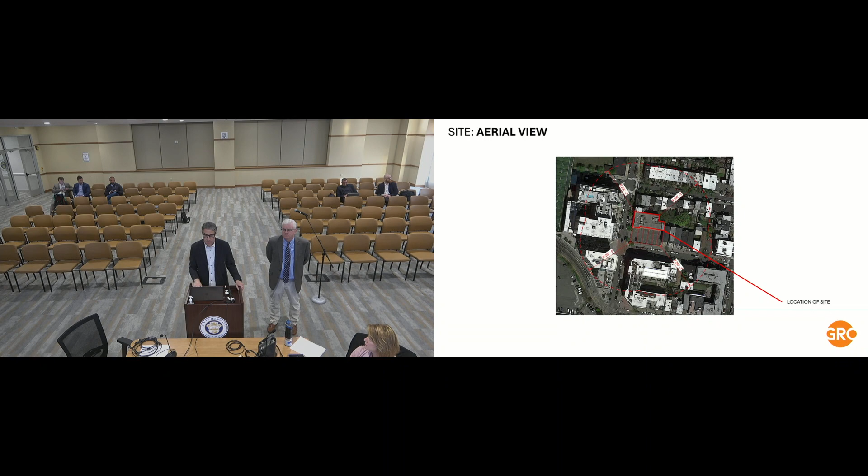You see that here in Tidewater. This is the historic buffer district in Tidewater. And then we have some photos of the building. You probably know this building. It's very handsome, some have said it was a firehouse, had been a firehouse. Some had said stables. I think it might have been even both.

But you see that the building was basically modified a little bit in 1998. We have the sort of drawings of that and so forth. I should also say that the Belfuse was a client of ours prior to the current owner here as well, so we've lived with this building not only as neighbors, but architecturally for some time.

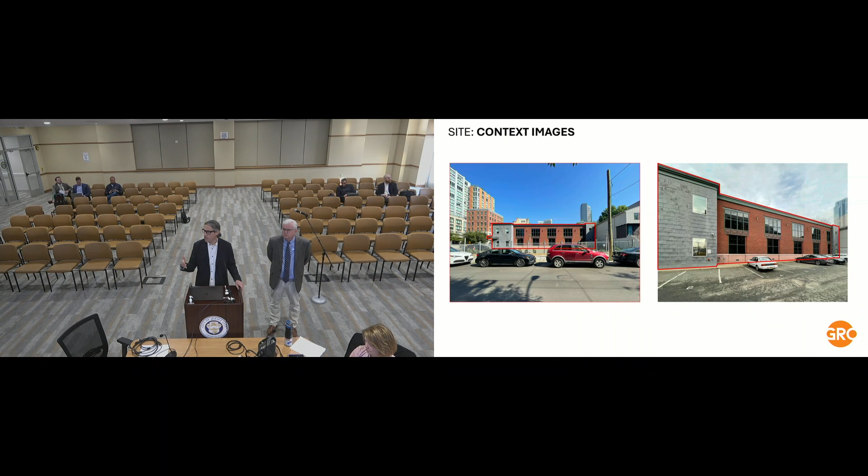This is the side yard. The thing I'd like you to take quick note of here is a Siamese connection that will have to be moved. Ms. O'Neill and I have spoken about this. Our preference is to move that from the south-facing facade to the sidewalk. If we do have to put it on the facade of the building, we'll work that out with staff.

And just for the record, that was subject of a certificate of no effect that was filed with Maggie, and that's referenced in the report.

This is the existing condition survey. You see the lots to be subdivided are largely a parking lot. You see the Belfuse building, as we call it, which is the gray entity here. And then the proposed subdivision is as such.

As Mr. Harrington said, all of the interior lots are 20 feet wide. The corner lot is 25 feet wide as required by Tidewater. And then we have a little bit of a varying depth, but that depth is somewhere around 65 feet. It gets a little tighter on the corner.

Just to take you through some key points briefly, this is meant to be subdivided from lot 30 to lots 30.01 through 30.07. The lot area as an existing condition is 15,000 feet. The total building area that will be left at Belfuse is 6,925 square feet, which is the existing condition, as is its configuration of 2 stories and 27 feet 2 inches.

As I mentioned, that existing structure will be adaptively reused, and then a very modest portion of the overhanging cornice on Belfuse will be cut back, basically demolished, and that was also in your staff report. And there will be some looking at window openings to make sure that we are complying with code.

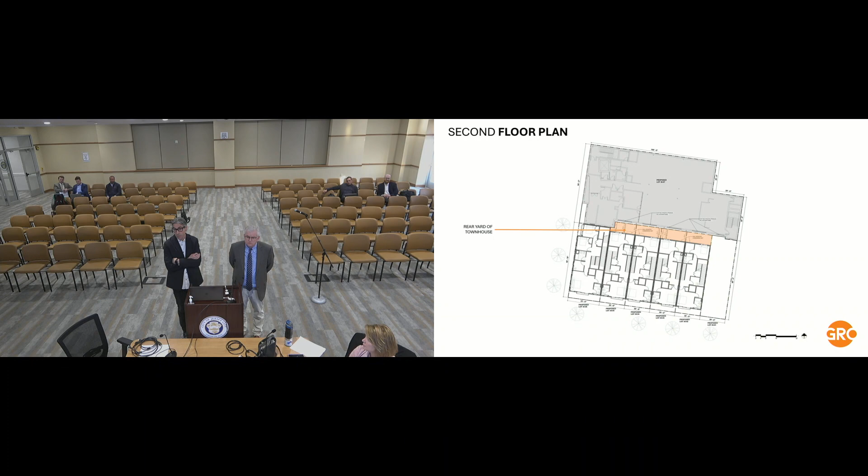What is the Belfuse building currently being used for? It's vacant. And you said it'll be adaptively reused for a permitted purpose, would that be commercial or residential? Currently, the plan is to make it a preschool, so more commercial use than a residential use. Both are considered by the plan.

I will just note, for whatever goes on in the Belfuse, they will have to file an application with HPC, right? This is, once again, just a subdivision application. I understand, I'm asking because, well, I'll get there. But so I know that we're only looking at the subdivision, but you're currently contemplating townhouses.

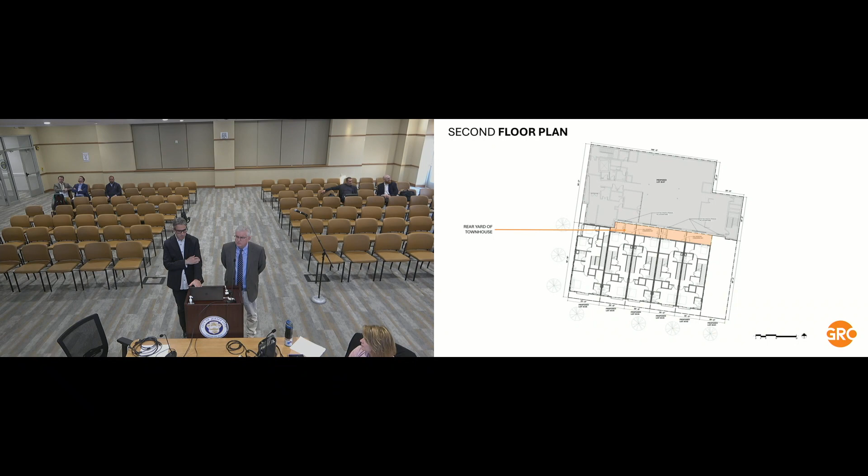And did you say there would be 3 family homes? Most likely I think it's 2 family homes that we're proposing. And how many parking spaces are there currently? There's no parking proposed. No, I mean in the existing parking lot, how many spaces is that?

About 22, I think. Okay, I am just a little concerned, not so much from a historic preservation perspective, but frankly, as a resident in the area, that we're looking at adding 10 to 12 homes and taking away 22 parking spaces. Also, sir, you have to remember that right now, this is a totally underused asset.

No, this is not public parking. This is gated parking, and it was never public parking, right? This was only for when Belfuse had the fortune of hosting its world headquarters or whatever it was called in Jersey City. Its employees would park there.

The Tidewater redevelopment plan, which again is a little bit beyond what we're here to talk about, allows for townhouse development at a density that is less than the R1 standards and doesn't require parking.

And I know too, if you live in a neighborhood, you're probably well aware too, across the street has parking within the building, which I believe is open to the public as well, not specifically just for their residents. That's right. But it would not be required on these sites.

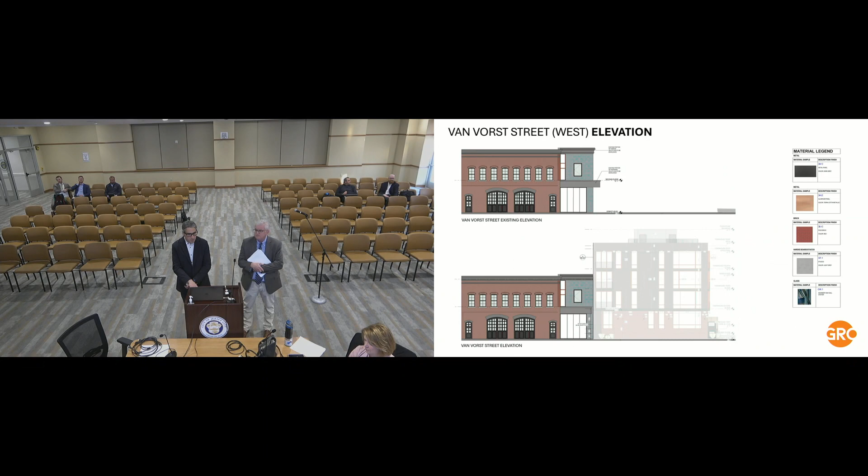And so those windows, in their image on the right, those 4 windows would be blocked up, or would they remain? In fact, I can show. Sure. I'm not sure how far to get into this, but basically this is really more for an application for the reuse of the building.

But basically, because that gray portion of the building, which is new, is actually extended back, if you remember the site plan kind of jogs a little bit, that also makes the depth of the parking lot the least deep at that point.

So those windows would actually be removed. They're not needed. And also, there's a building code requirement that was not previously considered, I don't think, that basically allows for a kind of percentage opening on that facade that would require us to close a window.

Now, I think that's an easy choice, because if you actually look at the rhythm of the existing windows there, right past the gray, down here, that's a double window, whereas on this side the cap is a double and a single, this happens to be a quad and a double, with quads and doubles in the middle.

So just moving this to a single seemed to be the best way to kind of make that code compliance, which is something we're gonna have to do anyway.

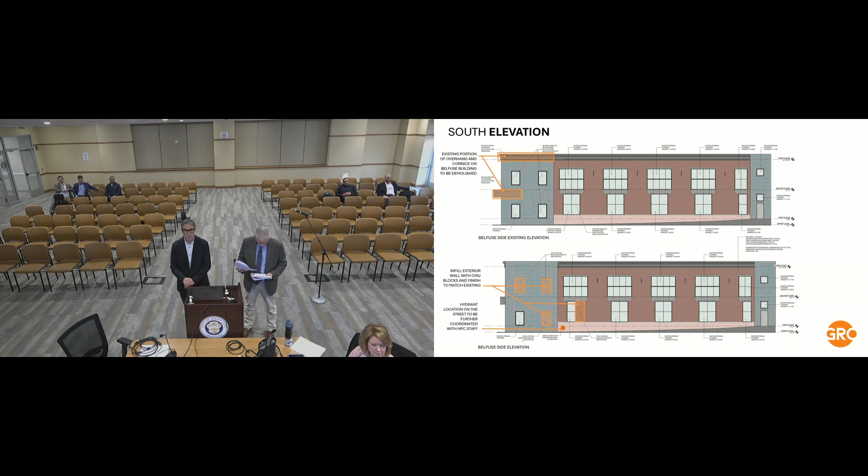One more question: the new lot that you're creating, that's just going to have the existing building on it, and maybe this is a question for staff, but would that then create a lot with essentially 100% lot coverage on it? Yep.

So is there any concern with that? That may be something more for the planning board, that we're creating a condition where there's a building with full 100% lot coverage. From a staff perspective, I'm really not particularly concerned about that. It was already a non-conforming building. We already had no rear yard setback here. If anything, by subdividing this, we are actually making its side yard setback much more conforming.

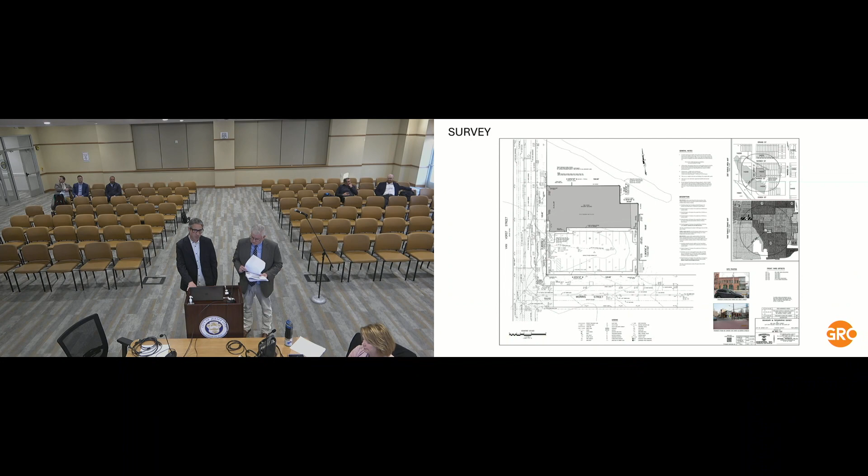Believe it or not, we are creating a little bit more pervious coverage because we're removing the asphalt. As I showed in the site plan, which is not approved yet but has been worked through with staff, there will be a small amount of pervious area as a rear yard. This whole lot at this point is slated for a playground, so there will be pervious coverage there as well. I don't know that amount off the top of my head.

The idea is that seventh lot, lot 3001 in our subdivision if I'm not mistaken, would be given to a kind of accessory use to the adaptively reused Belfuse building as a playground. It's going to be something for use by perhaps the daycare or whatever use that this new building has. It's not going to be like a public park or playground, just making it clear. Correct, it would be in connection with the daycare in the Belfuse building.

On this particular drawing, it looks like the playground only takes up a little more than half of that lot. We haven't really laid the playground out yet, but there's some concern about just putting children close to the street. We haven't worked that out totally yet, but we're not going to run that playground right up to the sidewalk. It's not a split lot, it's not like you're going to have another use towards the front of it.

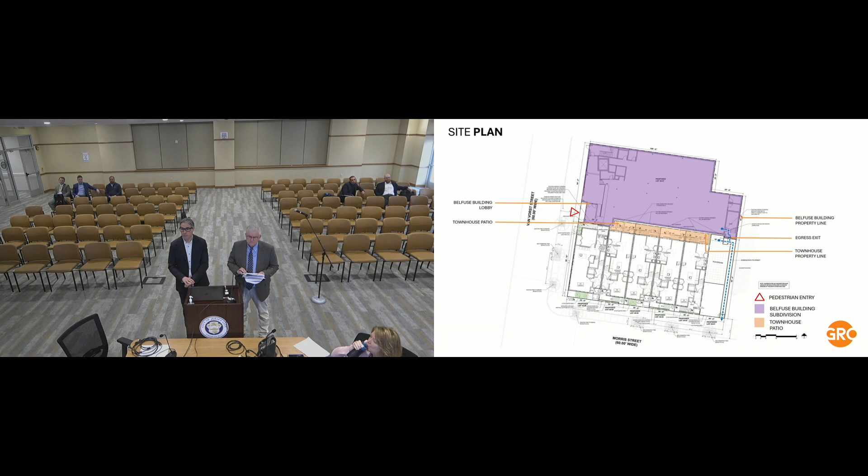Are there any additional questions? Chuck and Rich, anything else to add? No, that's all. It'll be a great addition to the neighborhood.

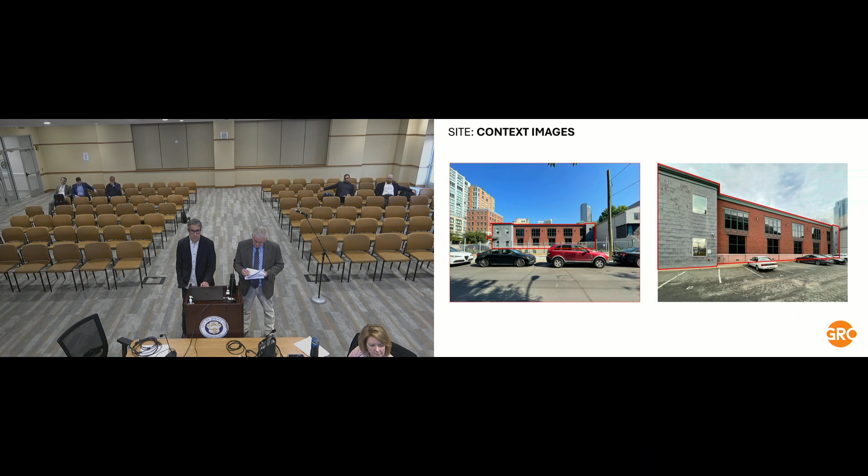The only other question I had, and I think this was covered, is that the lot is bisected by the district boundary. It wasn't clear to me - is that boundary the building? Because on this map here, it looks like the boundary goes through the building. It does, I think it's just an error. Yeah, it's okay, an alignment thing that has to be fixed. Okay, that's all I wanted to clarify.

Was this building still half in the district or something weird like that? Which I think as a result of this, we're all in agreement that this building's in the district. What we're subdividing out is not in the district. Yeah, you agree with that? Yeah, that's what happens as a result - you got half or full. It's like, you can't be almost pregnant.

Understanding that the gray bits of the building were part of that 98 addition or renovation - the windows on the south, within the existing brick fabric that face south, those don't appear to be historic. Can you speak to, since you're proposing to brick up at least some of it, when they're from? They're not historic - they are inoperable aluminum frame windows painted in a green that basically matches some of the treatments that were done to the building in the late 90s, 98.

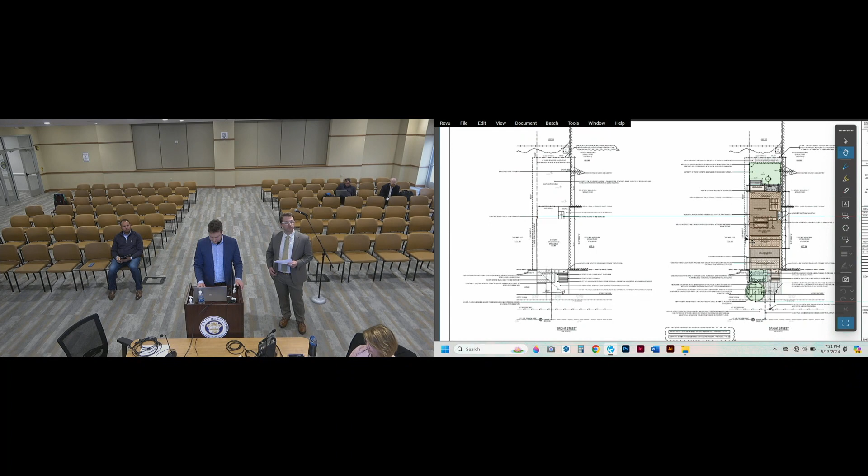Moving on to the proposed site plan, we are proposing our standard site improvements: new sidewalk, new curbing. We're proposing a street tree in front of the building. We're also proposing new landscaping of the front yard and a replacement of the historic fence that existed there at one point, but has since been removed before the current owner bought the property.

We are proposing several green roofs along with occupiable roof deck areas for the residents' use. We're also proposing glass sky doors for the roof, so there will be no bulkhead on this building.

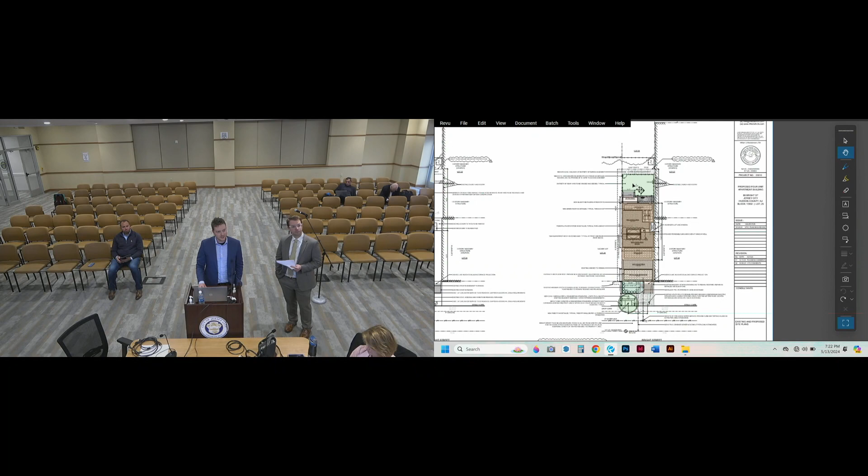Moving back to the rear yard, we are proposing new landscaping, a fence around the perimeter, and a new stoop and small patio area for the ground floor apartment. This is just our standard site details, so I won't spend any time on this, but I'm happy to go through it if there are any questions.

Moving on, I'll quickly go through the floor plans for the proposed building. We also have the existing floor plans here for comparison. The existing building will be gutted and reconfigured as part of the project. We're also proposing that a portion of the rear facade be removed to accommodate the addition. On the basement level, there are 4 units in the building.

Each unit is a two-bedroom apartment. The ground floor unit has a small entry vestibule underneath the existing stoop, which will remain as is. There's a bedroom in the front of the apartment, bathrooms towards the center, a second bedroom, and then a living space with a patio out to the rear yard.

The first floor is a similar configuration. We're maintaining the existing stoop and entry vestibule, and constructing a new stair to access the upper floor apartments. This unit also is a two-bedroom, two-bath unit with a bedroom in the front, bathrooms in the center, and living space towards the rear. This unit does have a small balcony as well.

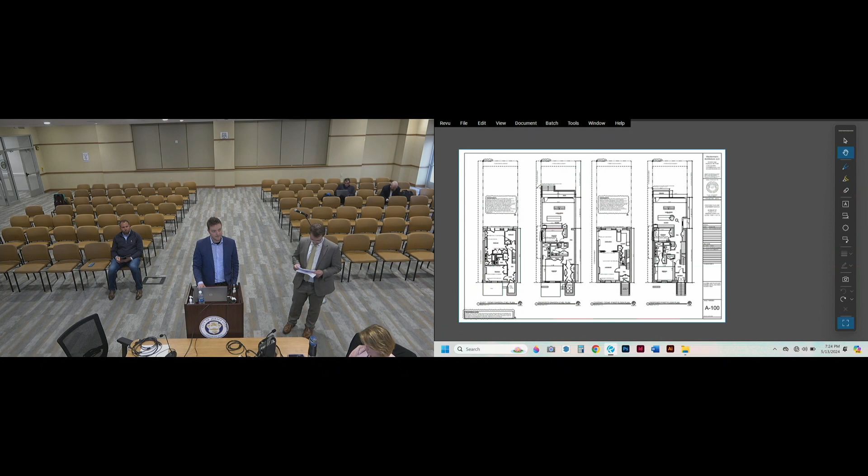The third and fourth floor will house two duplex units. The first unit towards the front of the building has the bedrooms on the lower level and the living space up above on the fourth floor. The rear unit is the opposite, with living space on the third floor and bedrooms on the fourth floor.

On the fourth floor plan, this is the setback I discussed previously. We have a 10-foot setback for a green roof area, and I'm proposing a small roof deck for this unit directly off the living space. The stairs continue up to the roof, and again there's another roof deck for the front apartment as well as the rear apartment. Those are set back from the facade an additional 10 feet.

Here we have the existing and proposed elevations. We're going to be reconstructing the iron fence along the front of the property, repointing and refurbishing all of the existing brownstone and brick on the facade. All the windows will be replaced to match the historic photograph. We'll also be replacing the front entry doors and restoring the transom window above the door. We are planning to repair the cornice, and above that you can see the proposed fourth floor addition.

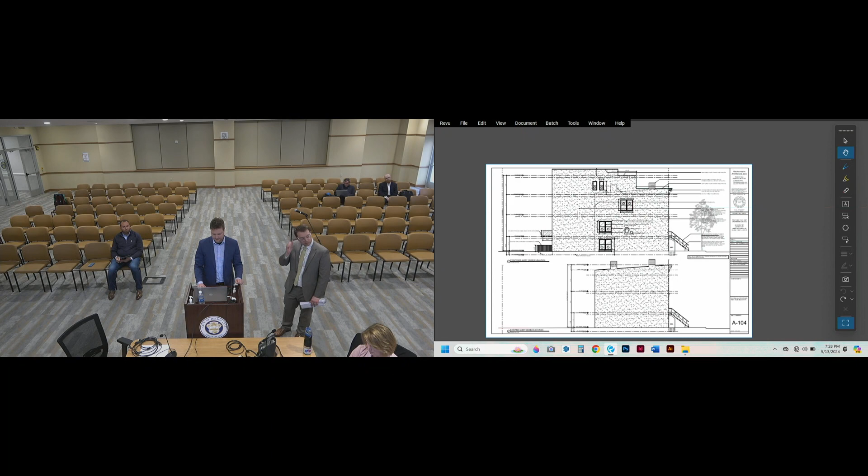And then our final drawing here is the building section of the existing and the proposed above, with the sightline diagram. One of the unique things about Bright Street is that it is a wider street, so it results in a greater setback for that fourth floor addition, which will not be visible from the public right of way.

Here we have the proposed and the existing block elevation. You can see that the proposed elevation is sort of in keeping with the height and general bulk of the buildings along Bright Street. I also have an additional exhibit, which I'll share at the end of the presentation, showing both of the two developments next to each other.

And then finally, we have our material selections for the building, including specifications for the windows for the rear and the fourth floor addition, as well as the sky door on the roof and the railings along the perimeter. So that concludes my presentation. Thank you.

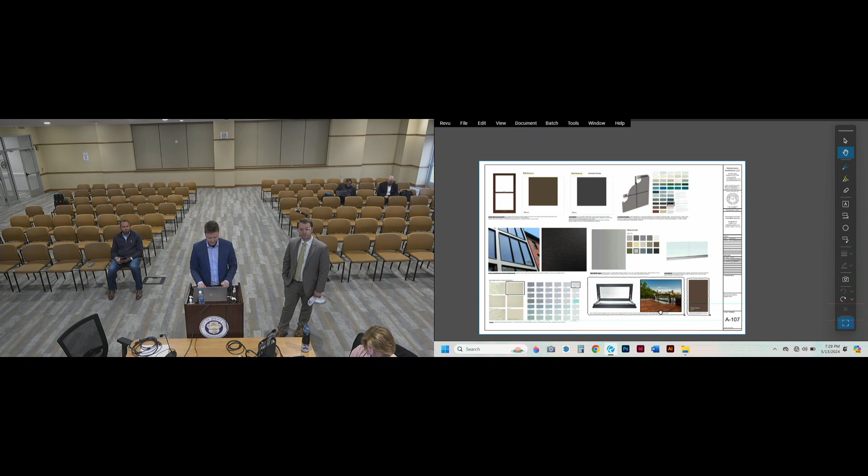So the next application is for a neighboring building.

So those windows that are proposed on the lot line, will those be in a light well then? Yeah, and they'll be coordinated with the building next door.

Okay, and I believe you said on the top of the building there's a glass rail, but there's also a roof or a deck at the lower level. Is it a similar glass rail? How is that handled? Yeah, let me go back to it. Just zoom in on the section.

So for the third floor roof deck, we're utilizing the parapet as the railing for the deck. We do have a divider, which will just be a basic metal railing, but that'll be well below the top of the parapet. And then for the roof, we set the railing back from the edge of the roof, so again it would not be visible from the public right of way.

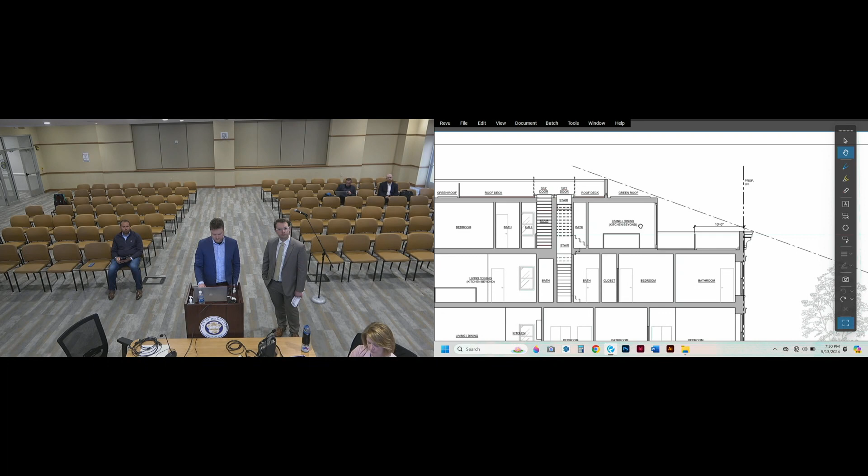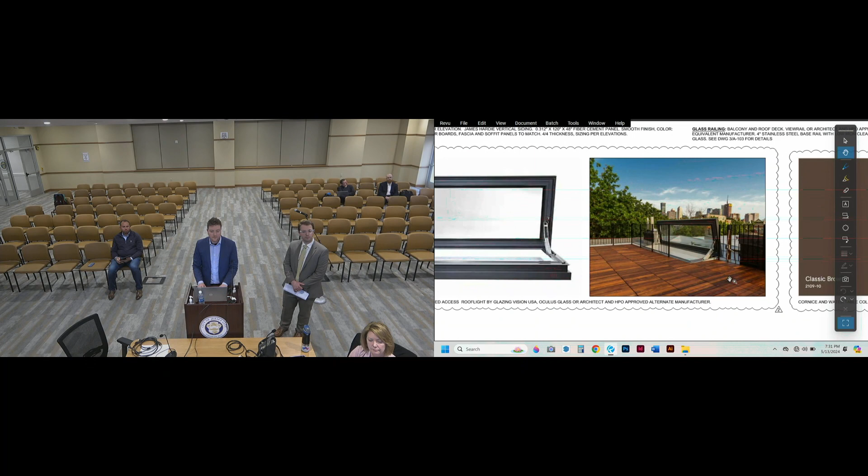Very good. Could you please show us the detail for the proposed door and explain the choice there? Sure. Actually, zoom in on the... not the sky door, the front. There's a change proposed, I believe, to the main door. But I do appreciate the sky door. Thank you.

So again, we're matching the tax photo, which originally had a double entry door. We're matching the same style and proportion of the photograph with the divided lights. All of the trim around the opening is original, so we're going to be keeping all of that trim and replacing the transom glass as well. Very good, thank you.

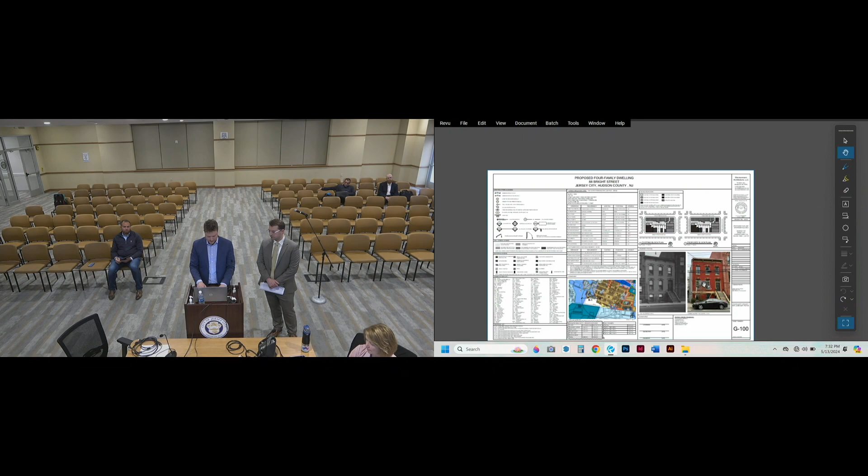And you're sure it was originally a 7-foot door? The transom size looks like it hasn't been altered. Yeah, that was a question we went through with staff as well, whether or not we thought that was original. You can kind of see here it appears to be proportional in this photograph, and I think that this trim, while it's hard to see in the photograph, I believe to be original, as is the frame for the transom above, but they replaced it with an opaque piece of glass at some point.

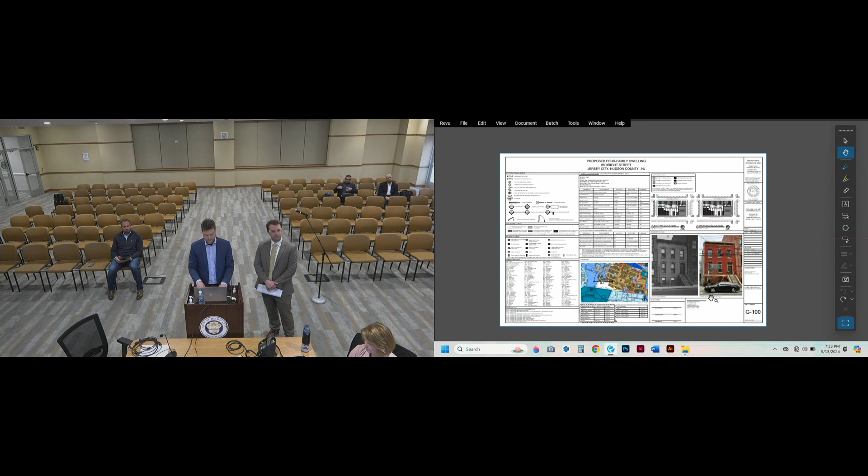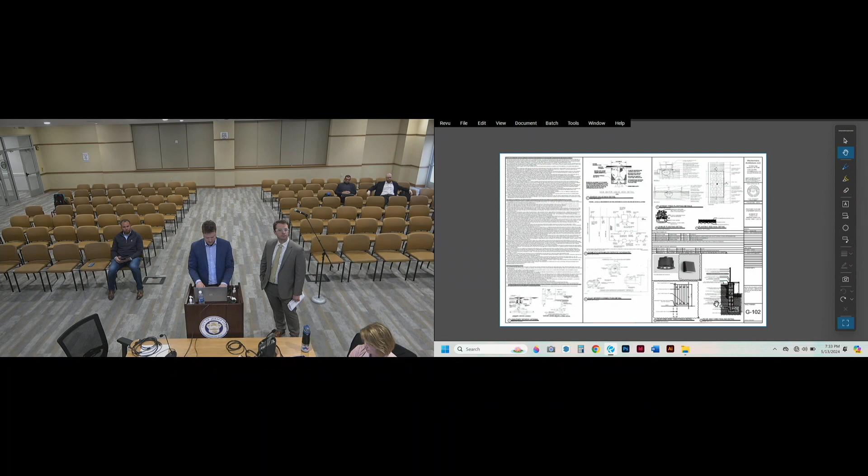And the set that was submitted, I don't know if the numbers are exactly the same, but it's A104. Excuse me, no, it is. Okay, I'm looking at the wrong one, sorry, give me one second. It is, yes, A104, and it's the proposed west elevation. Yeah, so it is the same.

What I'm looking at is there's a 3'6" parapet at the top, and it says aluminum coping, color to match stucco below. So is that a railing up there, or is it an extended parapet? It's just a parapet. Okay. But we do have an aluminum cap on the parapet, it's sort of our standard detail.

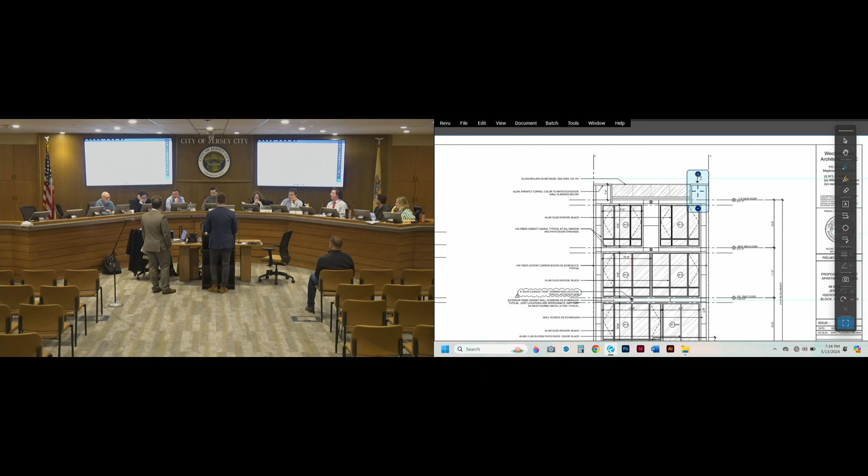Okay, so where's the glass railing then, or any of the railings? It's just on the front and the rear facade. Let me go back. So the sides are a parapet, and the north and south elevations are railings? Is that how you're doing it? Right. Yeah, so we extend the parapet around the sides and the rear, and then we just have the glass as the center portion. It's a similar detail, although the glass is a little more expansive on the front facade, but the parapet continues along the sides, and the glass is provided in the center.

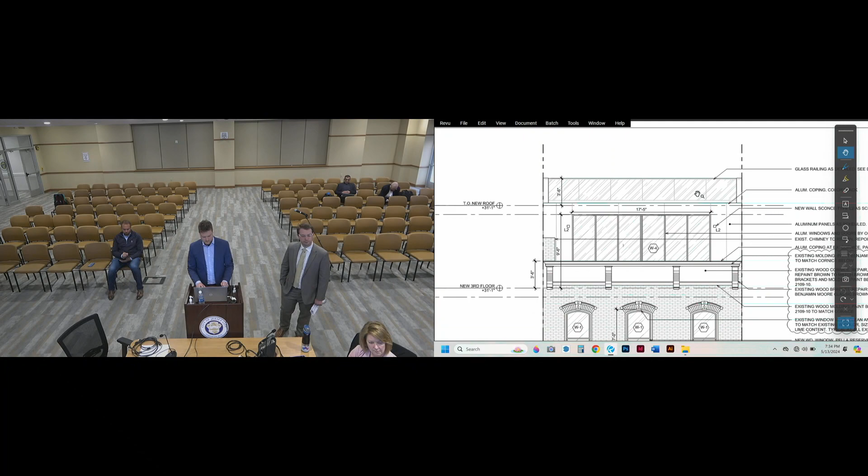And is there a reason you went with that instead of just a railing around the entirety of the top floor? It was just, we had so many conversations about the railings and the specifics. I can't recall specifically.

But I think Steve may have some insight on this. People feel uncomfortable with railings on the side. I think one of the things about having a railing instead of a parapet was that it would cut down on the apparent mass of the addition. I don't know if this is going to be visible from anywhere on either side, but I still think from other portions of the lot it would still help cut down on the apparent mass by not having a parapet with the same conditions as the addition below.

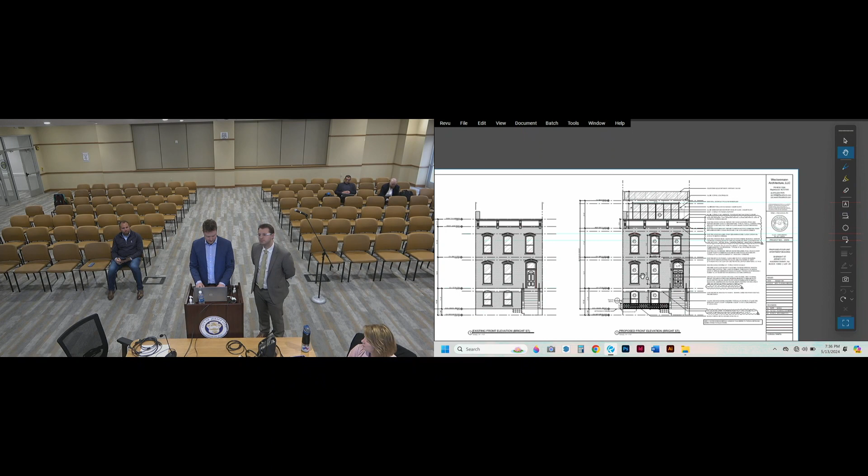Sure, it's hard to see in this, sorry, I misheard you. So the building on the corner is significantly taller than this building, and taller than the addition. So we have a parapet condition on that wall because it sits right up against the brick of the neighbor. Will, maybe you could show the exhibit with the adjacent proposal as well. I think the idea of the glass on the front and rear is to minimize the impact of that upper story.

So this is the combined elevations with the two projects. Again, this will be shorter than the neighbor, shorter than the adjacent building. Sorry to interrupt, do we have to mark this? Yeah, we do. A1.

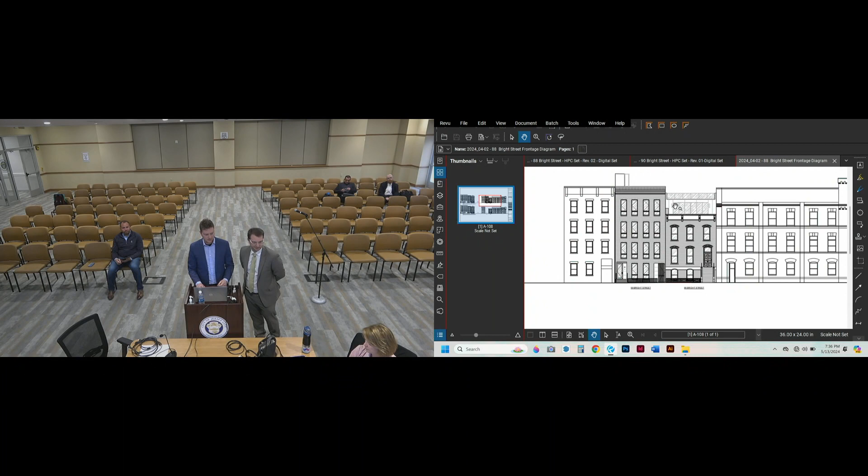So I guess either way, it's going to be up against neighboring buildings on either side anyway, so it doesn't really matter, except at the front and back where you have the glass. Correct.

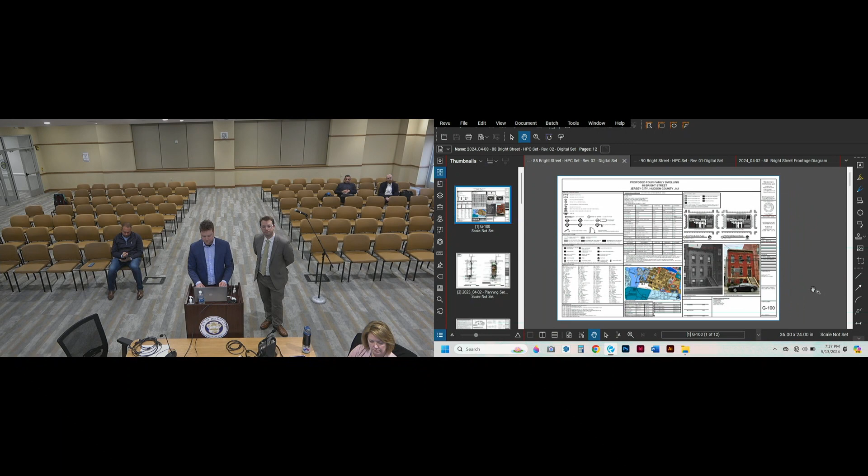You stated that there's no visibility directly across the street. If 90 Bright were not to be built, would there be oblique visibility of the addition? Yes, there would be.

And if the commission feels more comfortable reserving voting on this until hearing the second presentation as well, we can certainly do that. Are there any axonometric or render views of this? No, not at this time.

Do you have an existing photo of the rear facade somewhere? I think one was submitted with the application. I believe I have it. Helpful if the agenda was up. He's trying to pull it up.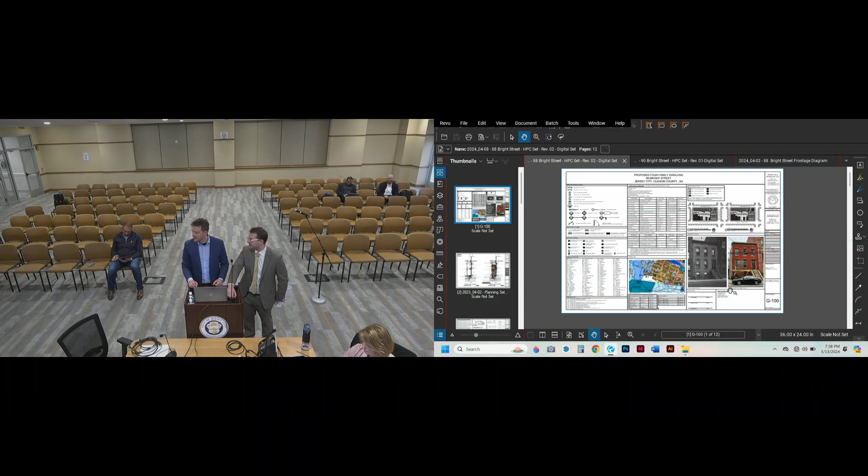Yeah, it's in the portal, maybe you can pull it up. I'm looking at it now. I need to borrow your dongle if I'm going to put this up. This whole piece you need, Maggie? Yeah, it only comes out as one piece. Although the website loading would be helpful. Thank you. Never had these issues on Zoom. Did it go? All right, be great.

It's still loading. Maybe in the meantime, you can ask a separate question. What's the plan for the painted brick on the front?

The idea is to remove the paint and repoint the brick as necessary. Have you done any probes? Is there a sense of what condition those bricks are in, and have you done any grout color testing? We haven't done any probes at this point in time, but the brick is in fairly decent shape. I believe we've had conversations with staff on submitting samples of the grout and doing test probes as part of the future work. Thank you.

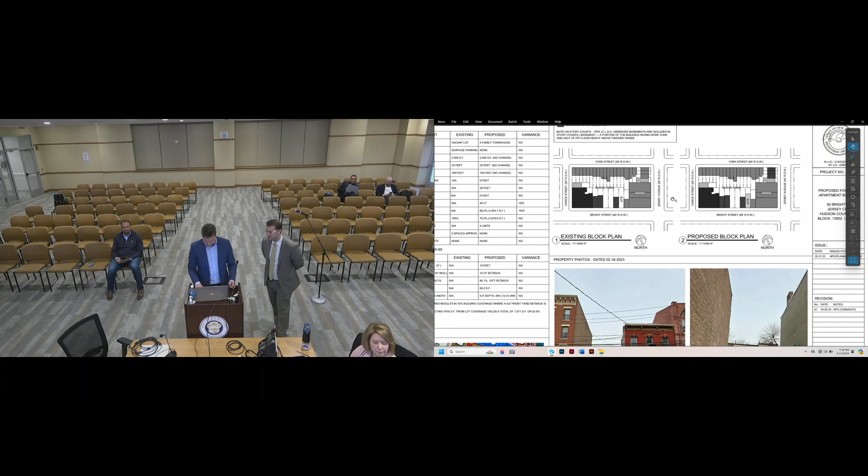Okay, so we're all very familiar with the location of this project. This is a little bit more of a straightforward application because it is for a new building on the vacant lot, as opposed to an addition, which we just talked about. Again, I'll start with the block plan with the proposed and the existing. It's currently a vacant lot, a parking lot that serves the church on Jersey Avenue. And we are proposing a new 4-story building with a 30-foot rear yard on this property.

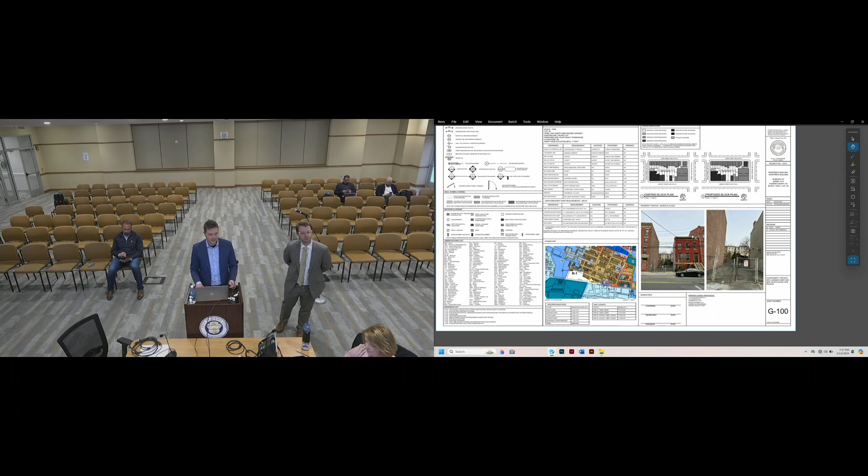We are seeking a building coverage variance because of the discrepancy between the bulk standards and the building coverage requirement. And we are also seeking a height variance for this application due to the flood zone - both properties are located in the flood zone. The first floor of this building is elevated up a couple feet from street level, resulting in increased height, so that all of the residential living space is 1 foot above the base flood elevation, which you'll see on the elevation drawings.

Again, we have our site plan drawings here. I'll point out the location of this easement on the east side of the property. What we're proposing for this property is the standard site improvements - new curb, new sidewalk, as well as a street tree. We will have a new stoop for this building to get access to the first floor, which is about 2 feet above street level. We're also proposing a landscaped area in the front yard of the building.

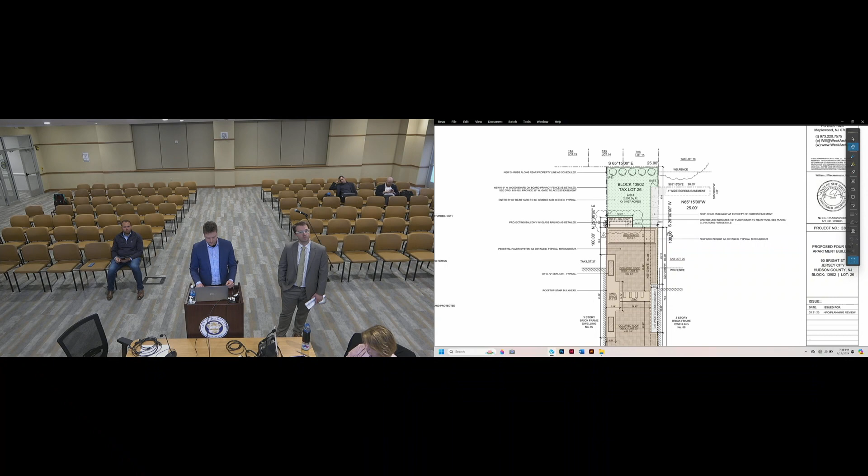The building is sort of an H shape, like a flattened H. So we are providing a light well, a cutout on the east side of the property. The top floor units - this property has 2 duplex units on the 3rd and 4th floor, each of which have their own roof decks on the primary roof. We're also proposing a balcony for the 2nd floor, and a new landscaped rear yard with plantings along the rear property line.

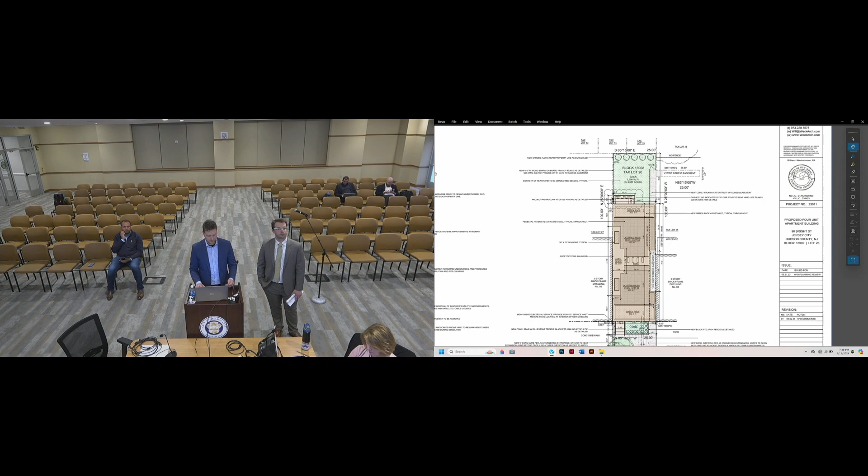We are maintaining this access easement, egress easement, providing a sidewalk that connects from 88 Bright Street and extends to the Bright Street public right-of-way. This dash line in plan is the location of the 1st floor wall, so the building actually steps out as you go up. We're providing a passageway through the building to maintain that egress easement - you'll see it more clearly on the floor plans.

Again, these are standard details. Happy to answer any questions on the specifications.

Starting with the 1st floor, I'll walk you quickly through the floor plans. We're proposing a new front entry stoop, as well as an entry vestibule on the 1st floor with a small building lobby. The 1st floor unit is a 2-bedroom, 2-bath unit, configured with one of the bedrooms facing the street, bathrooms and the 2nd bedroom at the center of the plan, and a living space with access to the rear yard.

Moving up to the 2nd floor, the configuration is again similar - bedrooms towards the front, bathrooms in the center with the 2nd bedroom, and living space towards the rear. This unit does have a small balcony as well.

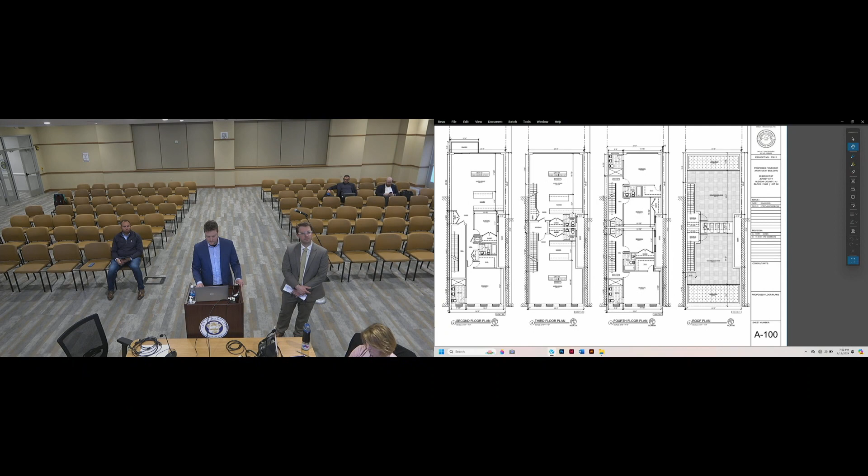As previously mentioned, the 3rd and 4th floor house 2 duplex units with the entrance on the 3rd floor. Both units have living space and a small powder room on the lower level, with bedrooms and bathrooms on the 4th floor. These 2 units also have private roof decks with the required 10-foot buffer on the front, as well as a secondary buffer in the rear with some green roof space. We also have mechanical space located at the center of the roof, and this project has 2 stair bulkheads that access the roof decks from the 4th floor.

The proposed elevation for Bright Street is fairly simple - a brick facade as the primary material with punched openings that match or are similar to the proportions of the buildings found along the block. We are using a brick cornice here, inspired by some of the other historic buildings in this immediate vicinity. If you look at the building on the corner of Bright and Jersey, as well as others, they all have these decorative masonry parapets, so that was the inspiration for this design.

The ground floor has the main entry door, which is recessed slightly, and we're proposing a bluestone or stone cladding adjacent to that door with a small canopy. That design is also reflected on the other side of the building, where we have a gate to access the passageway to the rear yard that connects to 88 Bright Street. We also have a detail on the cornice, as well as the railing and the first floor canopy.

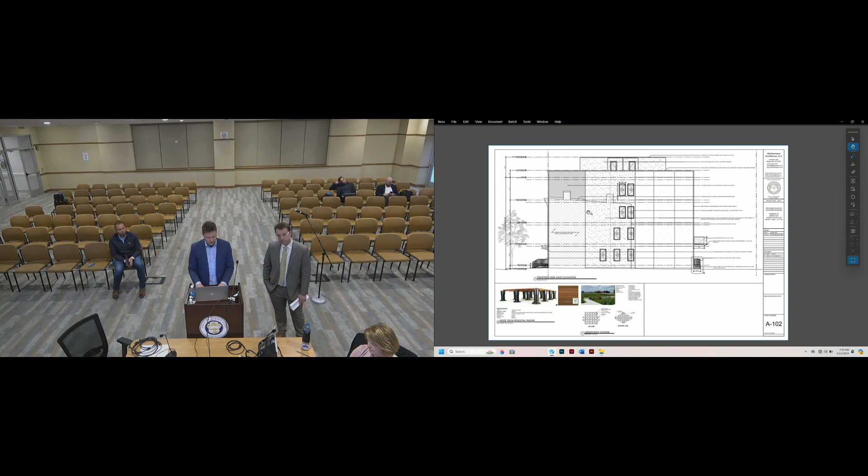I do want to point out that this is the outline of the building next door. It's pretty straightforward. We're proposing stucco for the primary facade material, and then extending the brick along the side elevation. You can see here on the roof level the location of the proposed bulkheads for the roof deck.

This is the west side elevation. Again, fairly straightforward. This hatched area denotes the approximate outline of the building next door. Again, we're using stucco as the primary facade material. Let me just go back, I forgot to mention it.

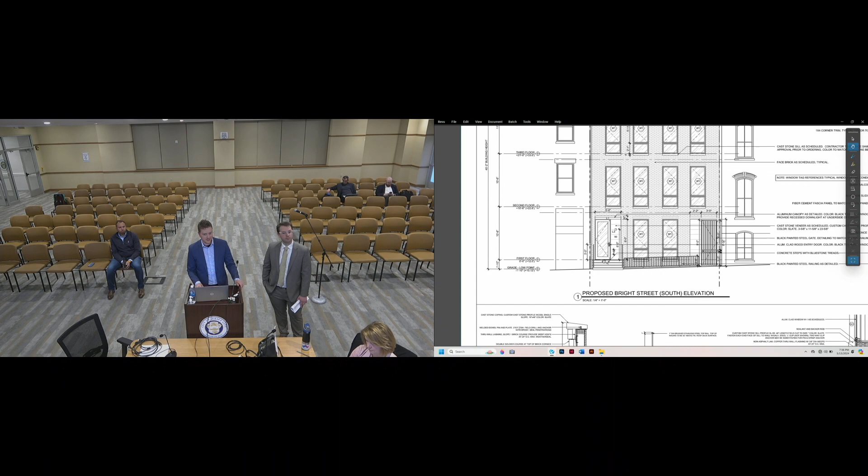The base flood elevation for this property is 11 feet, and the first floor is at 12 feet, which is 1 foot above the base flood elevation. So you can see here where the first floor is in relation to the street level, and also why we're pulling it up as opposed to having the entrance right at grade.

Here we have our sightline diagram. The bulkhead for the roof deck is set back, so it won't be visible from the public right of way. And we are also using the parapet as the railing or enclosure around the top floor roof deck.

Here we have the proposed and existing street frontage diagram, so you can see how the proposed building fits into the existing streetscape. Another thing worth noting is that we are matching the height of the adjoining neighbor, continuing that elevation across with this property. So even though we are asking for the height variance here, it is in keeping with the massing of the building next door.

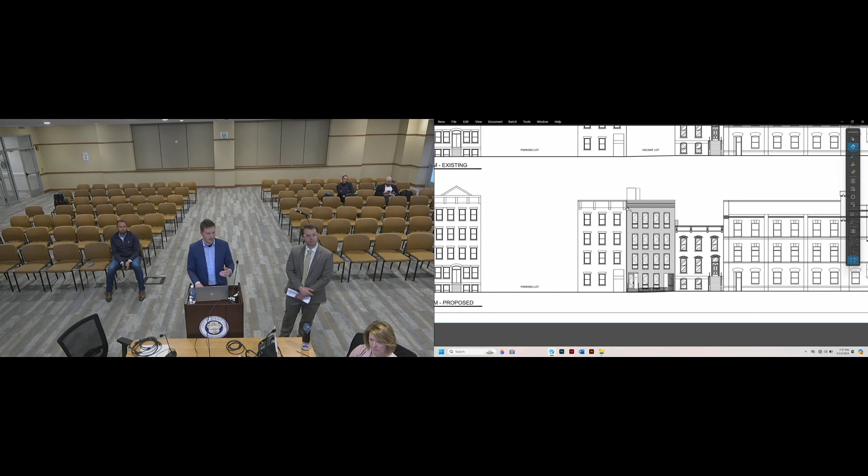Finally, we have our material selections. We're using an orange-red iron spot brick as the primary facade material, with bluestone accents on the front facade. And then large windows, as well as fiber cement panels for the rear facade.

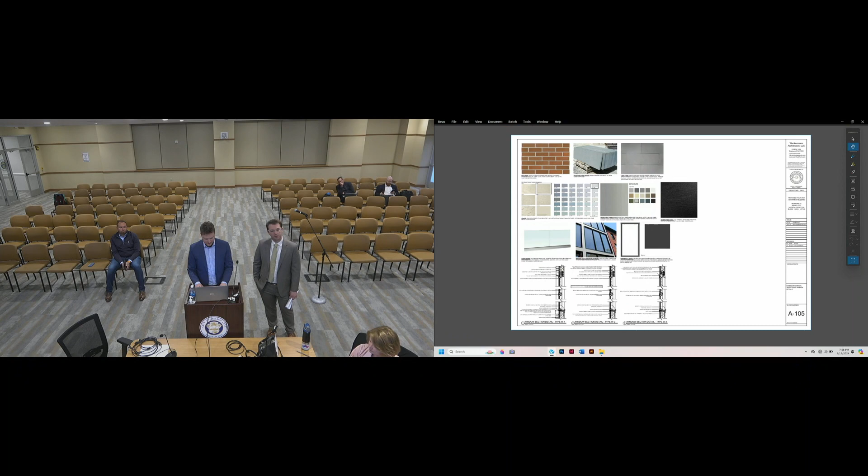And Will, if you could bring up that exhibit from the last application, I'd like to enter that on this one too — the elevation showing the proposed block plan for 88 and 90 Bright Street together. Again, you can see here the parapet line, the roof line is sort of consistent with the adjacent buildings on the block. So with that, that concludes my presentation on this project.

Thank you. The first thing I wanted to ask about was the cornice. I think the brick cornice is an interesting idea, it just seems, especially looking in section on A102 — I think you would need to show us examples of the brick cornices that are on the block and within the area. The cornices all project a lot more than what you're showing. I think it's a good idea, but a little underdeveloped at this time.

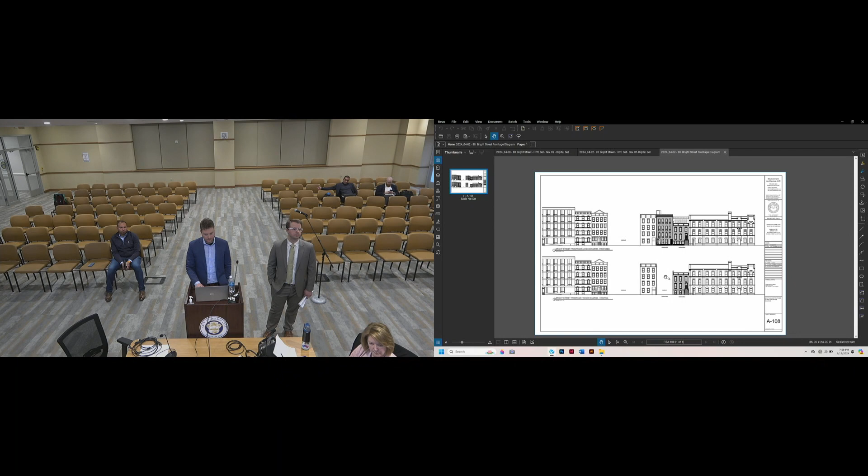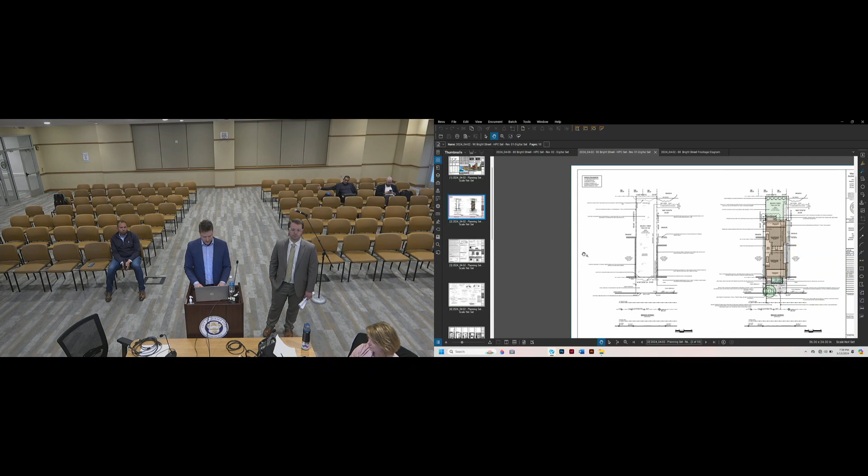Yeah, I think one of the things I'll say is this is a detail we've used on other projects in the past, particularly on south-facing elevations, where even a minimal amount of variation between the depth of the brick creates a shadow line. So one of the things we would do is a mock-up of this section of the facade so we could see what it looks like once we get into construction. But we do feel that between the undulating depth and the changing rhythm of the brick coursing, it would be sufficient to be noticeable.

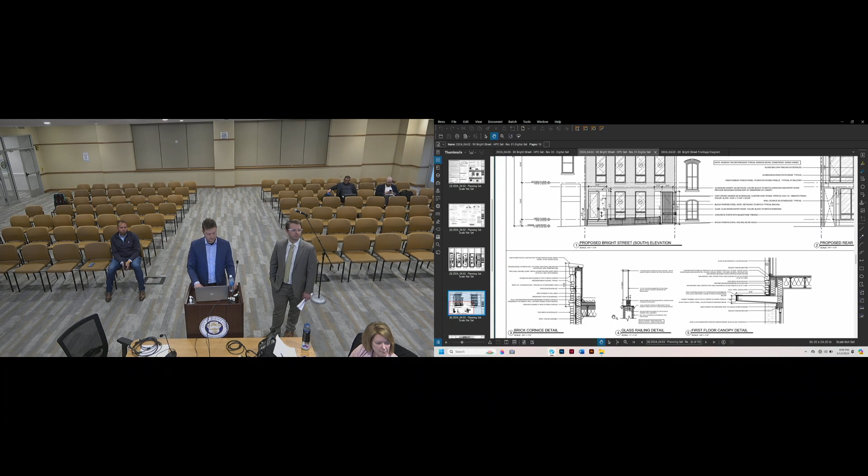But to go back to Commissioner Gunther's point, I think having a rendering that proved that out, and seeing the effect of that shadow from the point of view of the street, would have been helpful, especially in the absence of even rendered elevations. Typically for new construction especially, I think we're used to seeing a little bit more on the representation side. Sure.

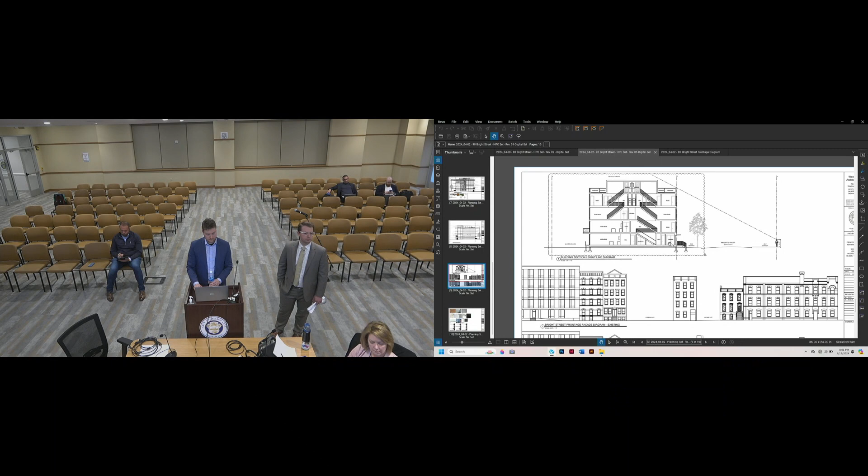And you don't have a full building section, do you? We do, it's combined with the sightline diagram. Okay, well, I think one of the things we need is just a facade section. I know you have some of it sprinkled, like the cornice, and on A105 there's a window section, but one of the things you want to see is the depth of the sills, the exact setback of the windows, and how that all plays together.

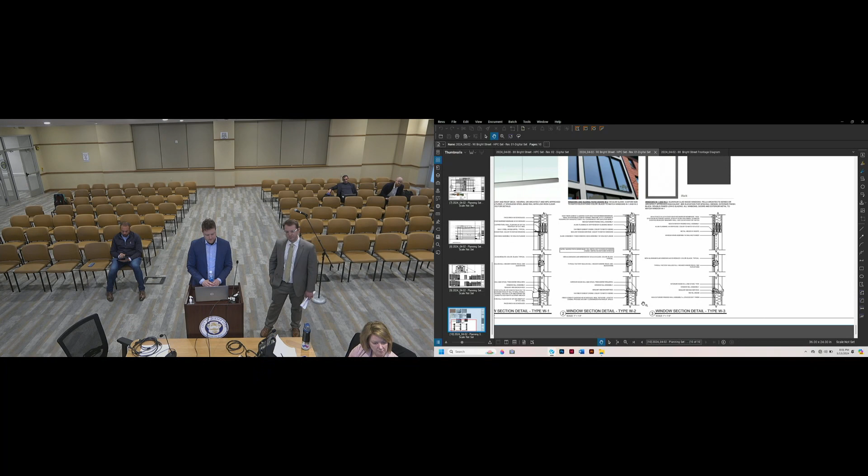So I think that's something we really need before I take a vote on this. The other thing is the thing that projects most from the building is the canopy at the first floor, which I think is kind of an odd condition to have that type of canopy projecting in new construction in the historic district.

And then on A102 again, it talks about thin brick veneer to match the primary facade. Is that just on the side facade? Just on the side facade? Yeah. Okay.

Oh, and why is there just balconies at the third floor? I'm actually okay with that. I think less balconies in the historic district the better, but I'm just curious as to why. It's just because the upper floor units have access to the top roof deck, so it's sort of redundant.

Okay, that makes sense. I still think metal railings are preferable to glass in the historic district - it's the normal vernacular, more like fire escapes, something that's more typical that we see. As well as, again, the amount of glazing might be a little excessive here at the rear facade. But I think generally the size and placement of openings at the front facade seem appropriate.

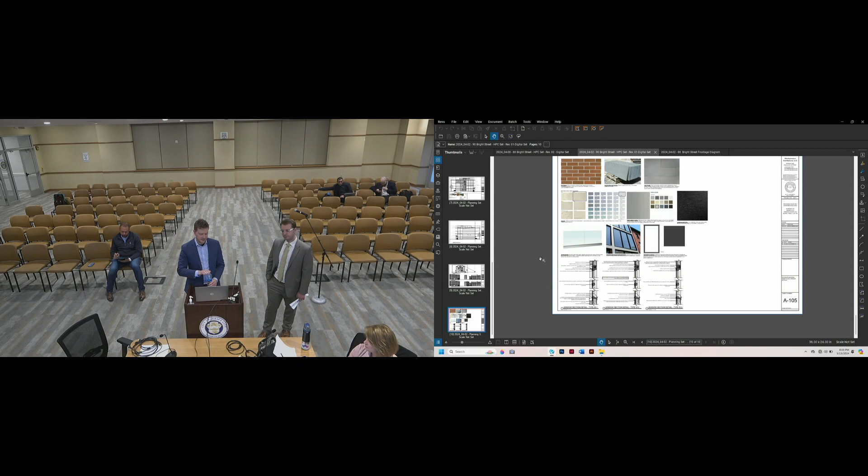And then for where the easement is, that's just a metal gate that's going to be open, or the area that's going to be open and people are going to be able to walk in and out? It's for emergency egress only, so it's required for fire egress, code egress from the church.

So people are just going to be able to leave and not come in that way then? Correct, it'll be like a one-way gate, and it's for emergency access only. So it's not - people can't just use that as an exit. Emergency only. Okay, just want to see if I had any other comments.

Okay, I could defer to any other questions or commissioners. I have a follow-up on the building section. Just the sort of shape and height of the bulkhead - is that as minimized as possible? Because I'm also looking at the profile, and I'm wondering if the floor-to-ceiling height could be reduced there, or the profile lessened, because I do have some concern without having rendered views, if 88, for example, isn't built upon, what could be visible for the bulkhead, because it's quite tall.

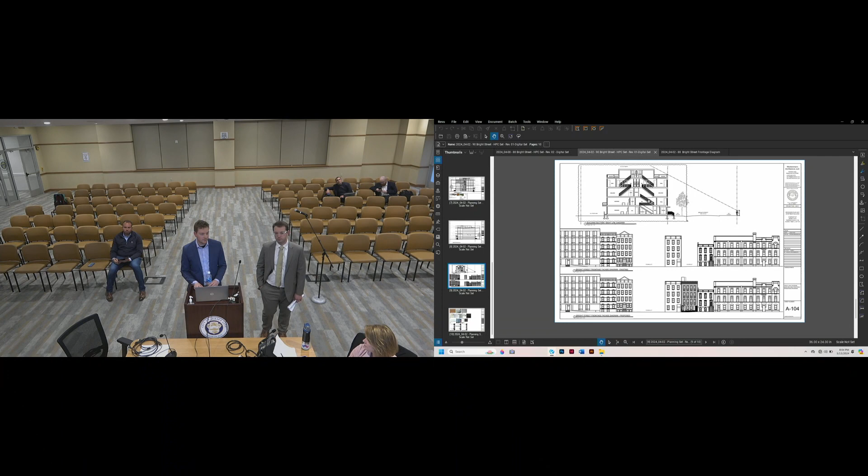I think that's a good point, and I think it's sort of a representation issue with where the section's cut. But I do think we would consider a sloped roof here, if that's preferable. Sloped roof over the stair bulkhead, if that's preferable. I just think that's something to look at, because it seems quite tall and boxy, and it's not necessary if it's just access to the roof.

And then, I agree with Commissioner Blazak that there's a good solid to void ratio on the front facade, and I have similar concerns about the detail on the cornice, because I don't know that we can really see how that's going to look, especially relative to these other cornices that are adjacent. I slightly disagree about the amount of glazing on the rear - I think this is a new building, and maybe it can withstand a little more in a way that 88 cannot. But overall, I think this is generally something I might be able to support.

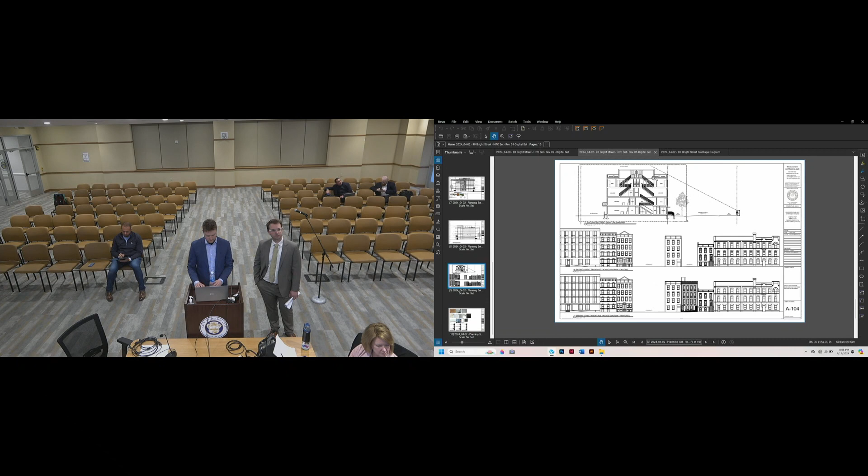Just one question on the solid to void ratio on the front, which I agree with my fellow commissioners - I think it's an elegant and appropriate seeming facade. The only thing I'm puzzled by is the change in floor to floors between the lower two floors and the upper two floors. Because that change, I think it's 8 inches or so, is absorbed by the brick area as opposed to the glass, it has the effect of looking squished between the second and third floor.

I was just curious why that shift. Yeah, it was just a function of the varying floor to floor heights. But that's a good point, and I think we could pick it up with the windows to minimize the proportional shift. I think that might make it a bit more elegant, and keep the brick banding consistent. To my eye, to my subjective eye, I think that would feel better.

I do want to reemphasize the front door awning. I'm not convinced - I'd like to see what that does to it in three dimensions, along with the brick cornice, the color of the window frames, the jambs, the color of the steps, and the railing. I think there needs to be a rendered view and a 3-dimensional anticipation of what this is actually going to look like before I feel comfortable voting on it.

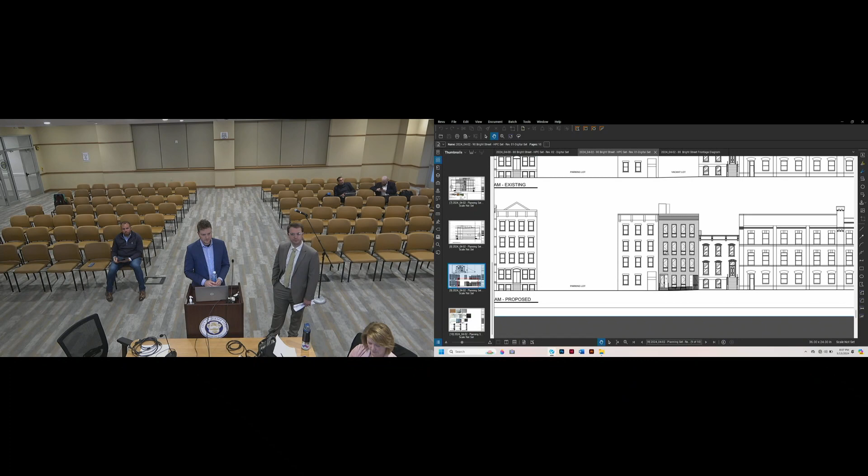On this particular application, the addition is a separate item. Is the front door set back with a cast stone veneer there? It is set back, but that's something that's hard to tell from the drawings. Is there a section or a close-up detail of that, or even a plan? It should show up on the plan - so it's a slight recess.

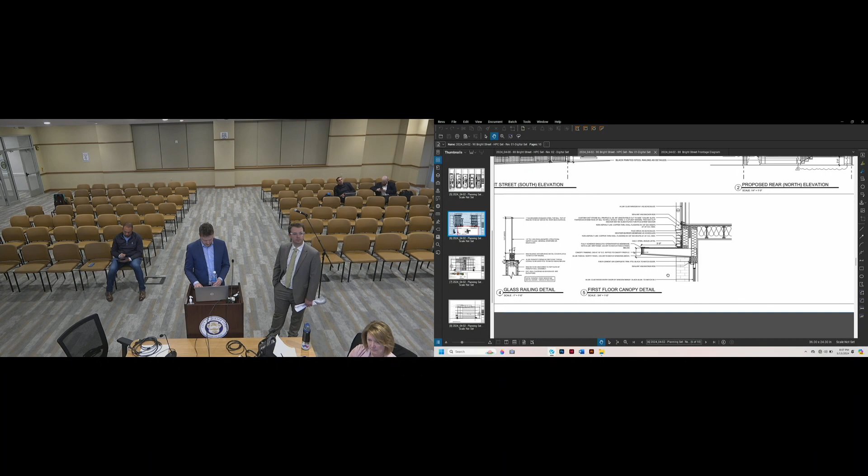You can kind of see it here in the section through the canopy. And is the frame of the door black aluminum and steel? Yeah, it would match the adjacent windows.

I think we would better understand it if we had an elevation just of the door entry, to show us how that's going to work. And what about the sides - I guess here there's brick on the side, but is that both sides? We would just need a partial elevation, a close-up of the door and the entry there.

So just to clarify, you're requesting an elevation of the side of the door? Would a 3D view, a rendering be preferred? If we're going to be doing a rendering, we could do a view that shows us what it's going to look like. But I think you can work with staff on that.

You were talking earlier about the gate to the easement - so would that be outfitted with a panic bar then? Yeah, some sort of interior device that would allow for egress in the event that it needs to be utilized, but it wouldn't be open from the street side.

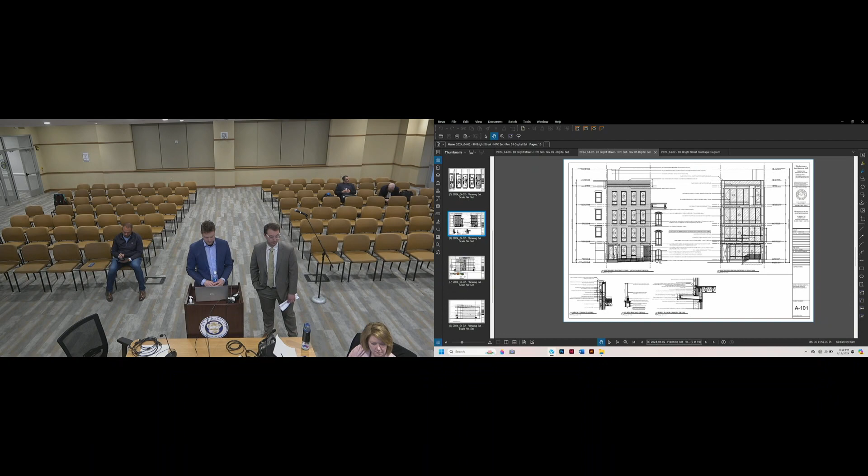And then at the roof, there's the open roof, and you talked about the green roof and some sort of setback that was required - can you talk about that a bit more? Sure, it's a 10-foot setback from the primary facade to the occupied roof deck, that's the area where we're utilizing the green roof.

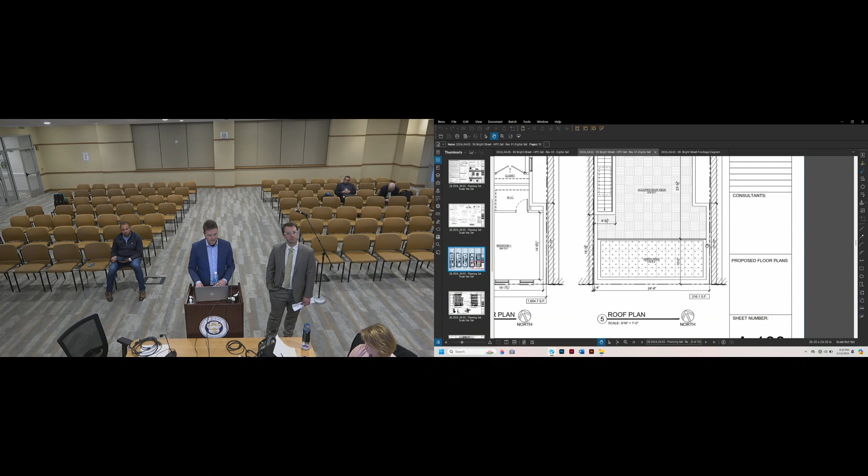Okay, and does the railing have to be at the setback? Where's the railing here? There's a railing at the edge of the deck, but then again the parapet is serving as the railing or enclosure at the facade, so there's not a separate railing - there's a 42-inch parapet.

Is that something required for new construction? I guess I haven't heard that come up before, or haven't been paying attention. The 10-foot setback has been in supplementary zoning for roof decks for historic districts since 2018. So every roof deck in a historic district you guys have seen since then, with the exception of one, 11 Erie Street, has all been set back 10 feet from the front facade. Okay, thanks.

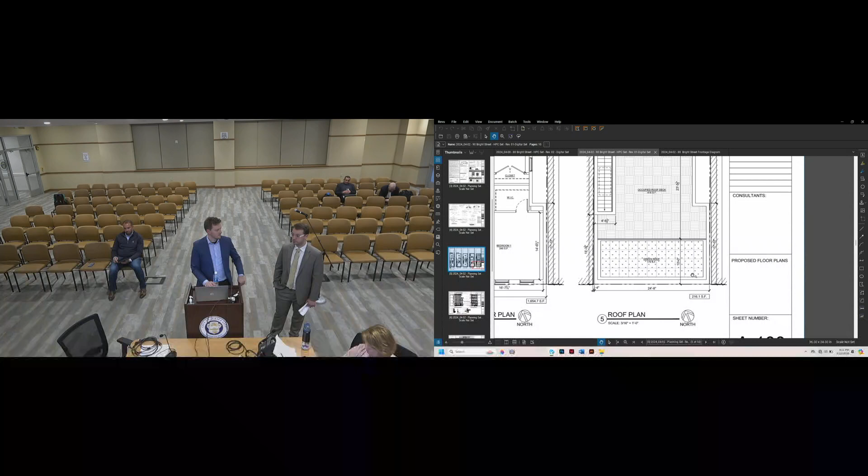Okay, are there any additional questions? I have one question regarding the entrance door. How wide is the door to the new building?

3 feet. I was just wondering, because so many of the buildings on the block have double doors, why you chose a single door. Yeah, that's a good question. It's just a little bit more functional compared to double doors, and since we're not trying to replicate the historic entryway here, we decided to go with the single swing door.

My other question is, are the windows on the front facade operational, or are they all just sealed? Do any of them open? Yeah, the top window panels are operable. The lower panels are fixed, but the upper section is a casement window or swing window.

Can you zoom into that facade a little bit? Which area specifically? Just into any typical window.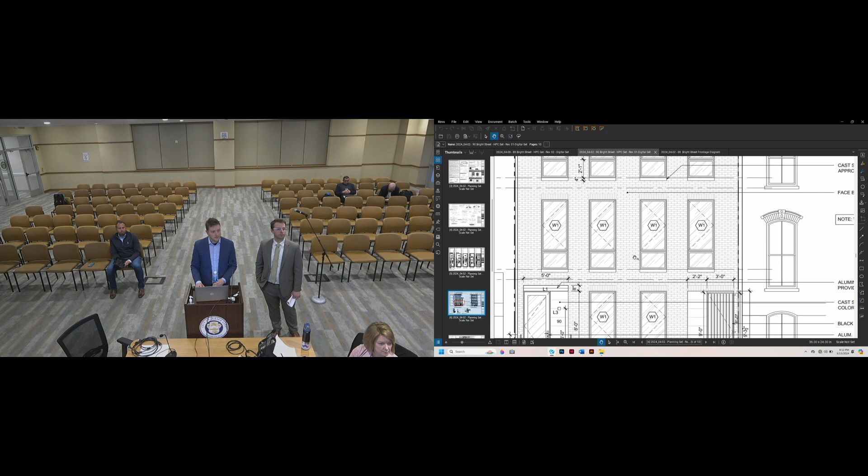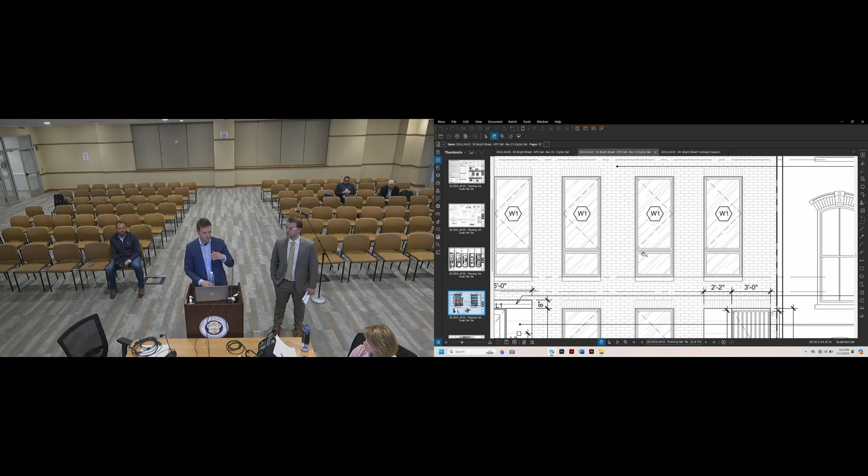Wouldn't the operable window have an additional frame that the fixed window would not have? Typically, yes, but not in this case. So is there a false set of metal frame for the fixed lights? It's just a consistent design - this particular manufacturer, the casement window and the awning window, or the transom or the fixed panel, the design is consistent.

I see, so that's to maintain that - so you don't have that condition where there's a fat line and a discrepancy with a thin line in it. Yeah. Can you go back? I'm sorry, you showed it already, but can you go to that window section again? So this is W1.

Thank you. Are these outswing casements or in-swing? These will be in-swing.

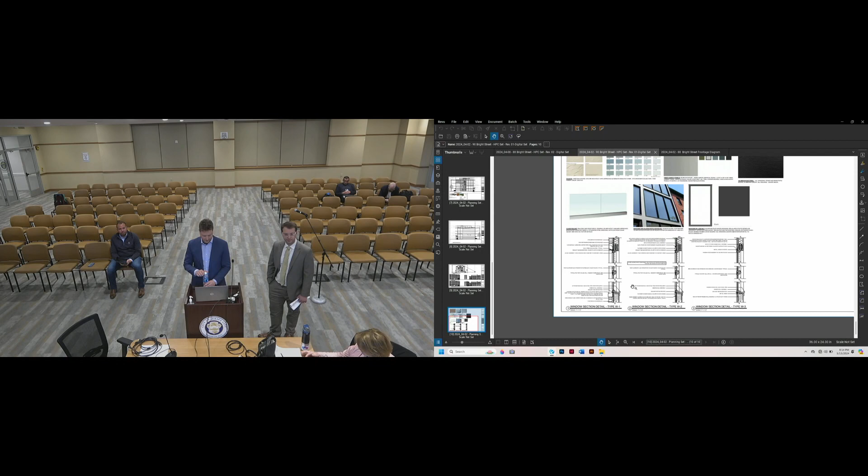And what's the dimension of this cast stone sill? Both the projection and the vertical height? It's 4-inch depth, or maybe, I'm sorry, I think it's a 5 by 5. That's the total dimension of the brick, of the sill.

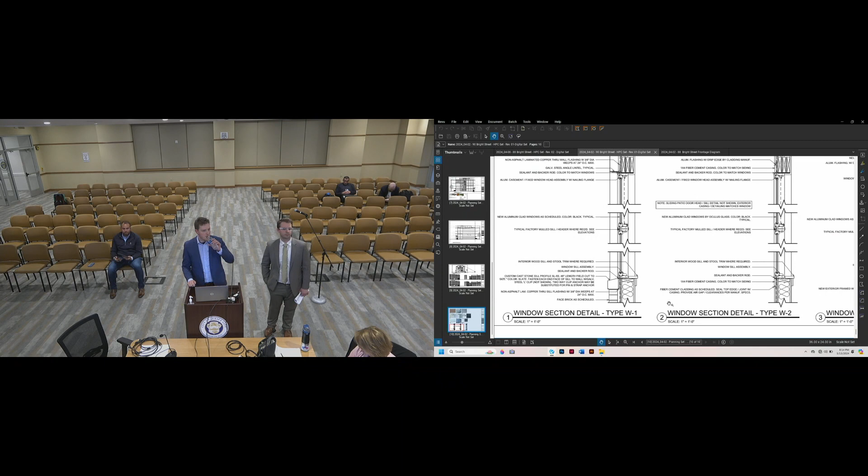I just want to go back to the question about the casement swing, because looking at this section, the screen appears to be on the interior, which suggests this is an outswing casement. This is detailed as an outswing casement, but since this was submitted, we changed it to a European style in-swing. So we can update that detail as well.

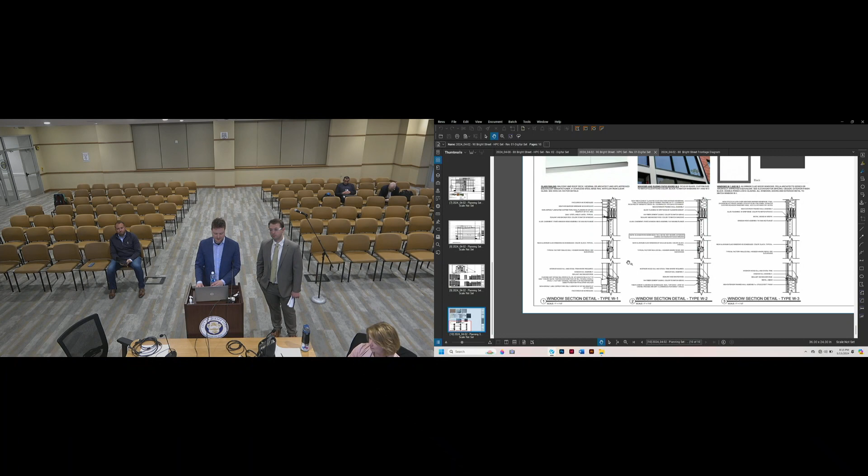I don't know if there are any other comments, but I think the feedback here is that you're probably heading in the right direction, but I definitely want to see some more details and some different views and renderings before making a final vote on this. If everyone else agrees...

Does that carry over to 88 as well? Did we ever really have the discussion on that? No, we just jumped into this one, maybe we should go back and give some comments on that too. So why don't we finish up 90 and carry it so we don't have to come back again? I think that's a good idea, Maggie. What's the next HPC? Next HPC is June 17th. Okay, that's fine, we can do June 17th.

Okay, wonderful. So just a quick question to clarify - we're happy to do a rendering of the facade from street level, so we can provide that easily. But there were some questions or comments about an axonometric sort of view of both projects. I'm just trying to figure out what would be the most helpful graphic to provide in order to get you guys what you need.

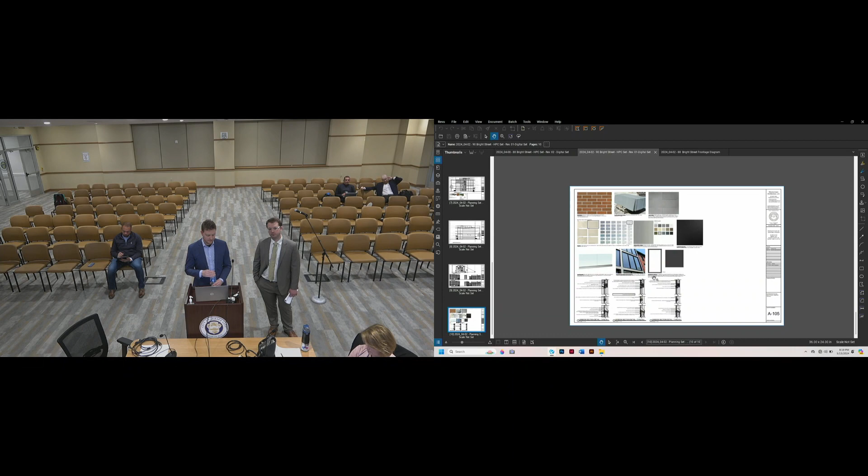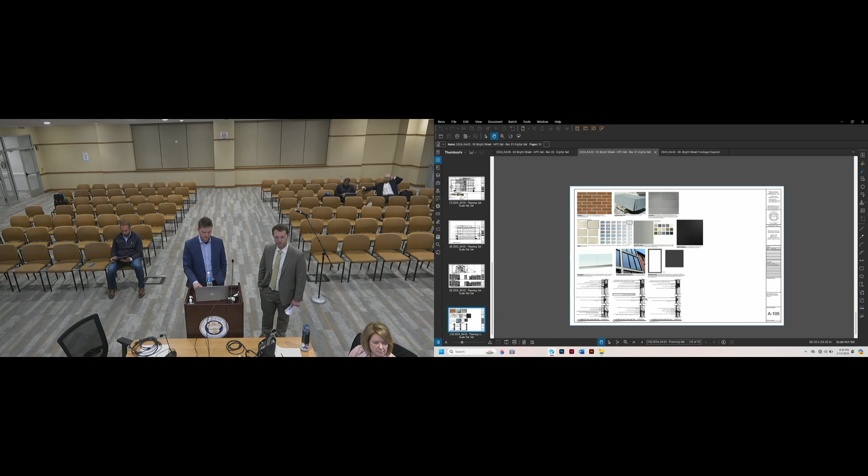All right, and with that, staff would recommend a motion to carry - what is this case number? H-23-0048, to the next regularly scheduled meeting of the HPC. I'll make that motion. Second. All right, all in favor? Aye. Aye. All right, and let's go back over to 88.

I think we left off with the glazing at the rear when we paused. Yeah, and I think this could probably apply to the other building as well, but photographs of the rear facades of other buildings on the block would help as well, just to understand the context.

I will be my characteristically unhelpful self here and just say, for my personal taste, I don't mind the amount of glass on either the addition or the new building.

Sorry, while I'm at it - what I am concerned about though is the amount of glass on the front of the addition, in the case where the new building is not built, because even though it's clearly out of the view shed when you're directly perpendicular from the property, I do think with the empty lot, if that's never developed, that amount of light spillage at night might be problematic. So that's, for instance, because you have this odd condition of not having the building next door, a rendering from street view, again as my fellow commissioner noted, showing what that would look like without the new building there, would be helpful to me.

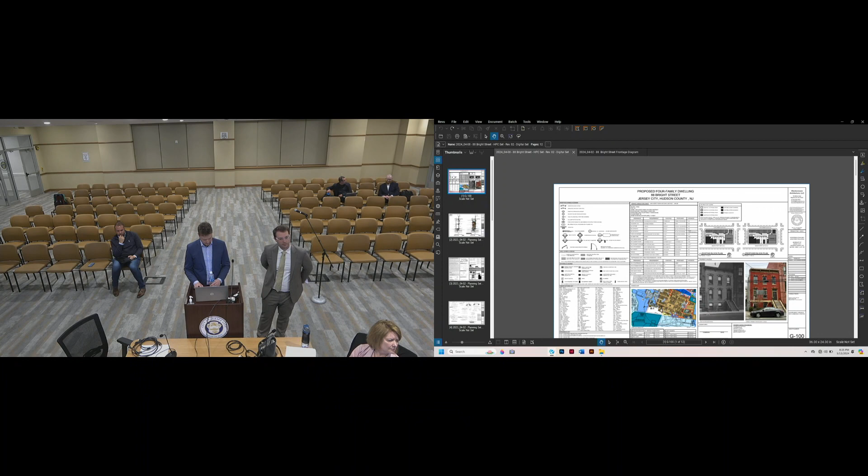Okay, I have one last question about 88. What color will you be? Did we discuss the color of the cornice and windows and trim on 88? Sure, let me pull up the elevation. Yeah, so the cornice would be brown - we have the paint spec color here that we intend to use. Windows? Yeah, the windows would also be brown. So the cornice and all the windows and the wood trim would be brown.

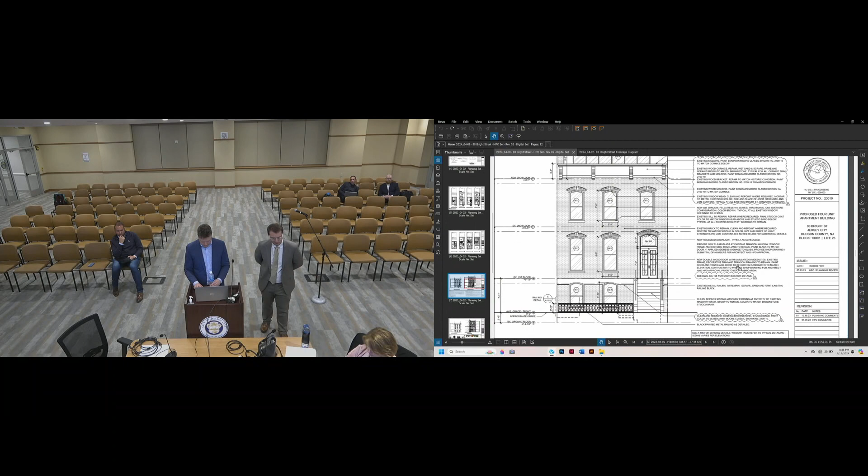The brick obviously would be repointed - we can get you more information on that. And I think we're also proposing to provide new parging at the face of the stoop, which would also be brown, but we can get you more information on that if it's helpful. Okay. I'm assuming because it's an Italianate that the brick is hard fired, and I'm sure the paint will come off fairly easy. Yeah.

That's it for me. Okay, any other questions, comments, anything like that? Great, I think we have a lot of good information. I appreciate it - sounds like we're very close here.

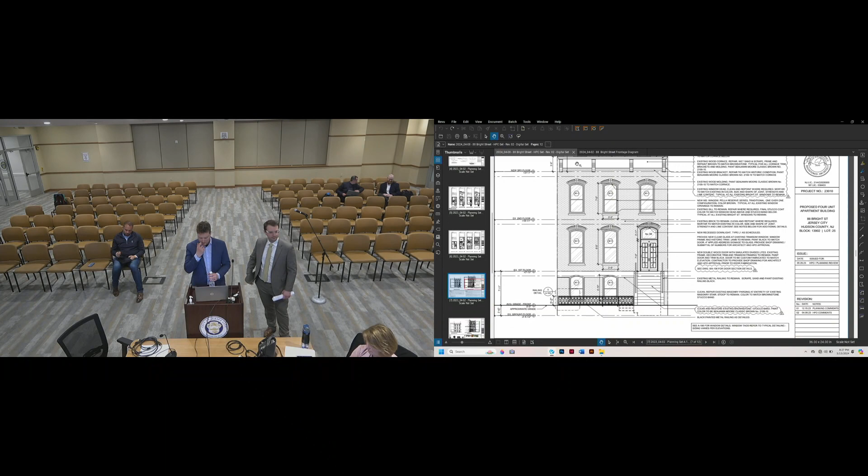All right, with that, staff recommends a motion to carry case H-23-0047 to the next regularly scheduled meeting of the HPC on June 17th. Is that at the request of the applicant? At the request of the applicant. I'll make the motion. Second. All in favor? Aye. Aye. All right, the application has been carried.

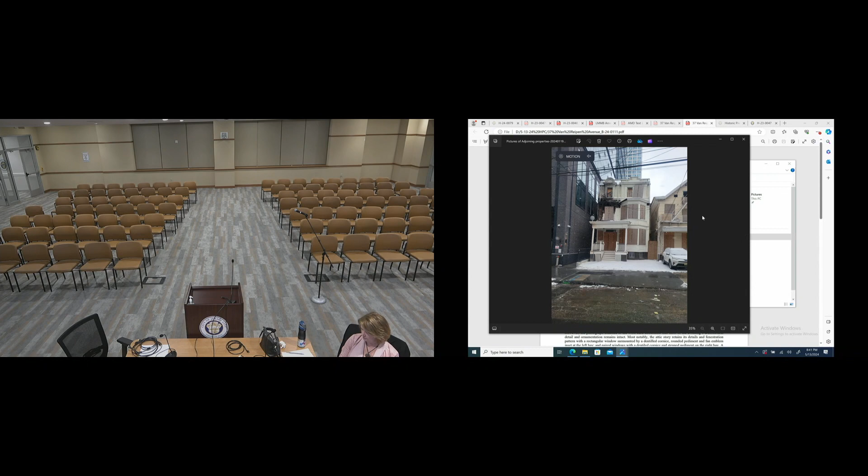Okay, so this is 37 Van Reypen. So we reviewed this proposed demolition. This building is within the Phase 1 Historic Site Survey, where they recognize it as having architectural significance. This building is also in the newly revised historic inventory of the Jersey City Master Plan.

I can pull up - here is a side view of it. You can see this directly abuts one of the new buildings on Homestead Place. And then if I pull up - no, come on, they're all in the same place.

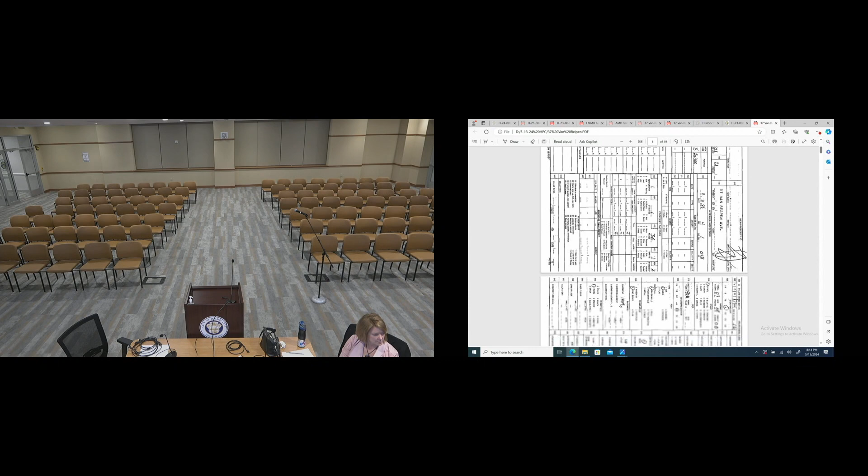It is a magnificent house. Inside, it's got dual staircases, tons of space, a lot of original fabric. It's always been a beauty, and it's always been well cared for.

So I will just state for the record, the level of care as of late on this building, I don't believe is as high as it has been in the past. I could see that, the boarding up. Was there a fire there? Yes, there was a fire, but not enough to...

My understanding is, no one has submitted any paperwork to me stating there's any structural instability in the building as a result of that fire, but there might be. Who knows? I do have up the tax card file.

This photo here, where you can clearly see this—this is the, what is it, the 1975 photo, where you can still see that architectural detailing up at the top. The '38 photo, admittedly, is not great. However, if I could rotate up at the top here, you can still see its general form, right? You can just make out that curve up at the top there and that little guy over here. And you can see that the window fenestration is more or less the same.

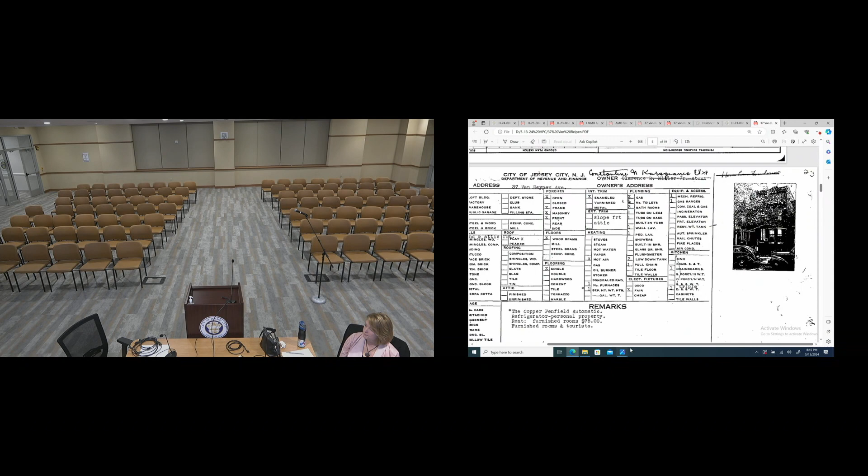Are there any other questions from any commissioners on this?

If not, the recommendation is to... I forget how we did this last time. Motion to deny via a resolution? Is that how we did it last time? I think we have this. Jonathan, we have this discussion every time, and this is just one of those. I have many things in my brain that stay there for the rest of time. This is one of them that just refuses to stick.

We just need to give a report to... a resolution to authorize staff to provide a report to the zoning officer to recommend denial? I think a resolution recommending denial would be sufficient, and then that resolution can be provided to the zoning officer. Because the important part is that the commission is making a recommendation to the zoning officer, and that within that resolution is showing that you have reviewed the application and specific reasons. In this case, Commissioner Amatuzzo's description of the historic resource that it provides is what the court is looking for.

And we could also say we just agree with the memorandum, the determination. I think it would probably be better to have specific reasons rather than just a pro forma 'I agree with Maggie's memo,' but both are defensible. Just to show that the commission has reviewed the application.